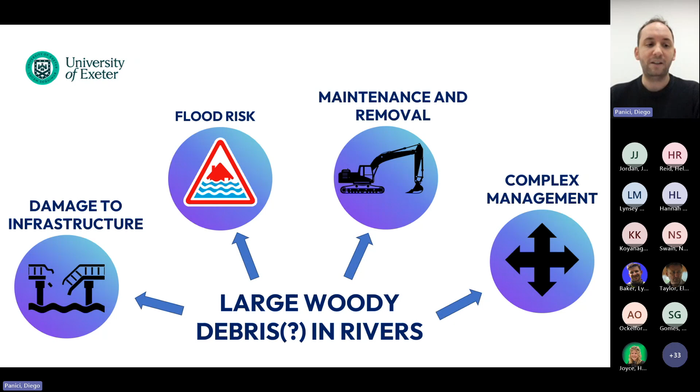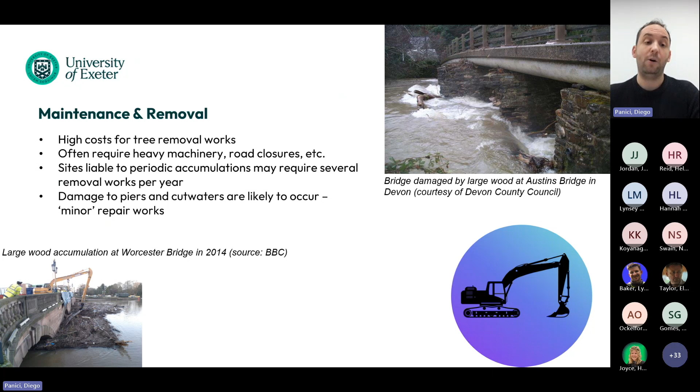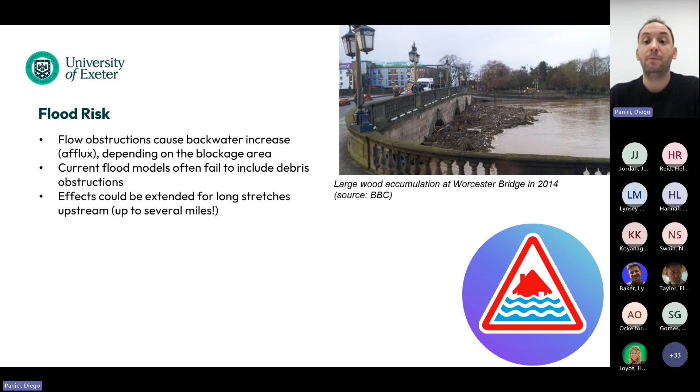And we have flood risk. That's perhaps quite an easy one to spot, because we have a blockage of bridge openings, meaning that we reduce the available flow area, and therefore the increase in the backwater will be quite significant. And especially in large rivers, the effects could extend for several miles. So it's quite an important factor.

But I guess one of the aspects that really has a substantial impact is damage to the infrastructure. Because what happens in this case is that the undermining of the bridge foundations can cause bridge failure. And we have seen it many times: when there's woody debris, although we will see shortly that this word should be dropped, it may significantly contribute to bridge failure.

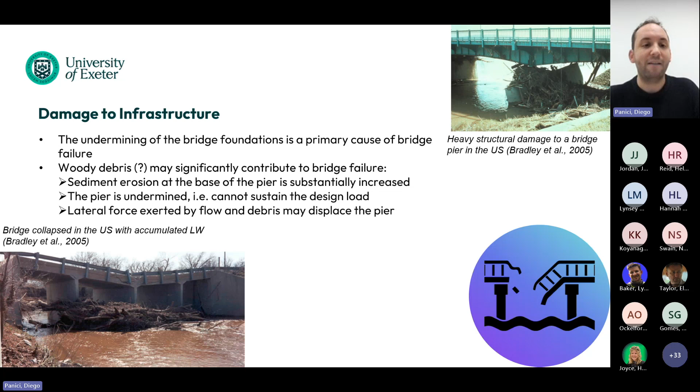Because what we have is an increase in the erosion at the base of the pier. There's therefore pier undermining, and that means that the design load the bridge was meant to be carrying can no longer be carried. But we also have additional lateral forces that can displace the pier.

So another one for you, a very quick one. How many bridge failures are caused by large wood? Do you think 10%, 20%, 30%, 40%, or 50%? This is just to see how important you think large wood will be in terms of bridge failures. And I'll have an answer for that very shortly.

Right, so there seems to be some consensus around 20% or 10%. 50%, that's very brave, but I can already tell you that is not the case. The actual answer is 30%. So roughly 1 in 3 bridge failures has been caused by large wood. So you can see it's a very important aspect in terms of hazard to bridges.

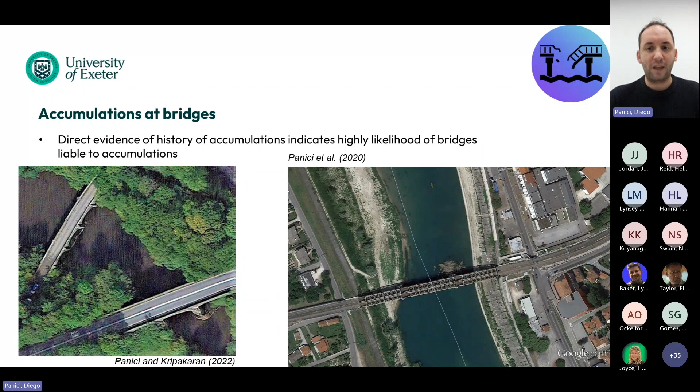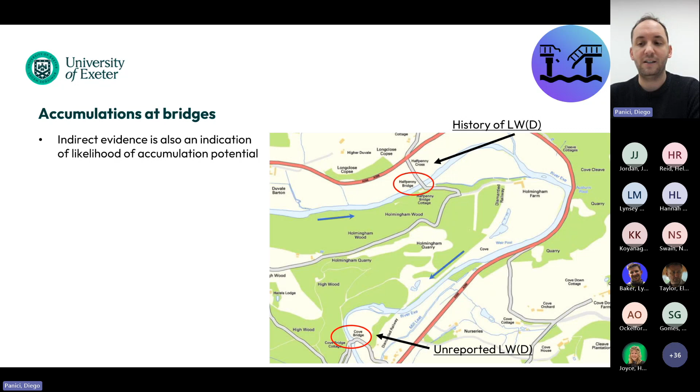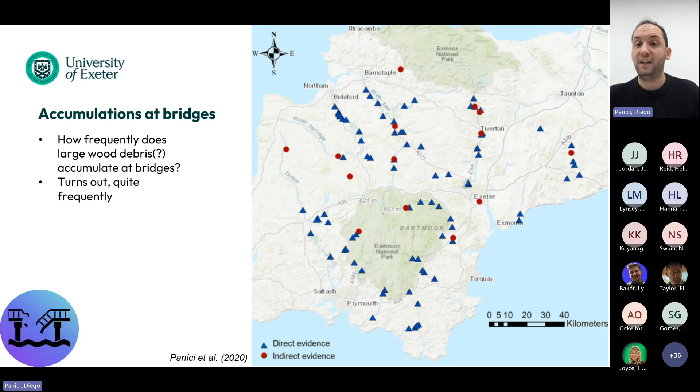But if you remember this slide that I showed you just a second ago, the majority of them do have a history of accumulated large wood. So it is actually possible to estimate that directly. That brings me to the next step, which is, okay, how do we define the hydrodynamic actions to the structures?

But when you add accumulated large wood, the increase can even double the depth of scour, meaning that if you are a bridge engineer and you are designing your bridge with a certain foundation depth, that might not account for the effect of large wood. And as we said earlier, 30% of bridge failures are actually due to large wood accumulations.

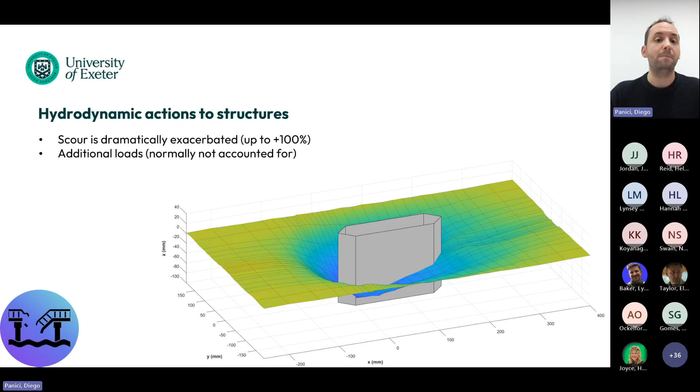But there's also a few other things to consider. So crucially, the size of scour depth depends on how much blockage we have, so how much large wood is accumulated at the bridge pier. It depends effectively on the area that is blocked by large wood. It also depends on the relative water depth, so the depth underneath the large wood jam, and on how much it extends upstream. So the first key question was, how do we determine the size of large wood accumulations?

Well, as part of my PhD, I carried out 732 laboratory experiments in a flume, which was quite a lot, I must say. And all of them displayed similar trends, similar patterns, which are quite crucial now to understand why we have these behaviors. So all of them resemble the half-cone shape. They had the same shape for all the different conditions that were studied.

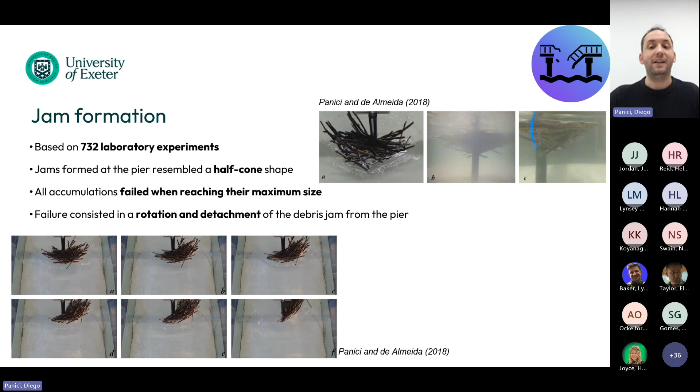So it does suggest that if we have accumulation of large wood and there's potential for large wood to accumulate until the very maximum size, that will be within the narrow band that we can observe there. And so we developed some equations with which it is actually possible nowadays to estimate the maximum size that a large wood accumulation can reach at a bridge.

And as part of my postdoc when I was here in Exeter, we tried to include that also in the scour estimation, because we have equations to estimate scour that are based on plenty of experiments from the past, but few of them actually investigate large wood. So we tried to do the same.

And what we found out is that instead of redoing the equations entirely, we can just include an additional factor, F_LW, in which we account for the increase in the scour depth due to large wood. And in that case, it just boils down to knowing the size of the large wood accumulation. So based on a series of experiments that we carried out, we were able to determine that F debris. And based on that, we have 3 different factors that depend on the size and the blockage area that determine how much it can increase.

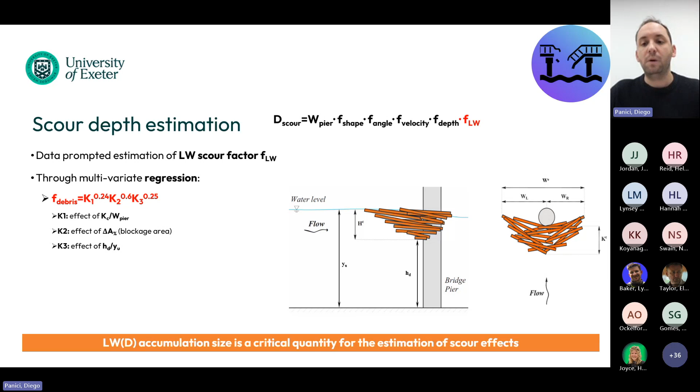Just to share that the results that we had from our research have been included now in two manuals. The one is the CIRIA SP171, which has been published in 2021, which includes several of the publications that we got out of it. So today it's possible, if you want to use those equations, to actually try to estimate the scour depth, but the same also for national highways.

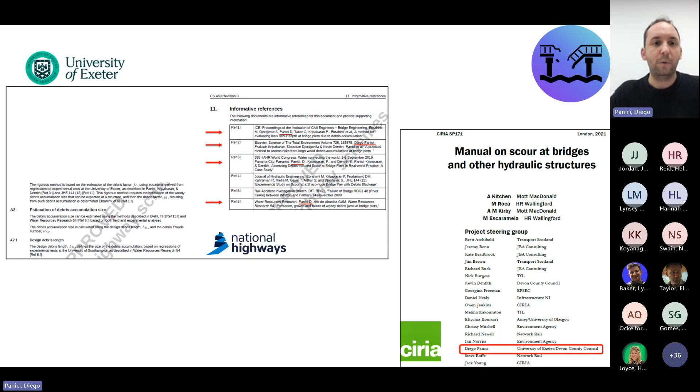So that's the CS469, which is a standard used for bridges in highways. And there is now a new section, which is compulsory for use, which gives you the estimation of large wood and the estimation of scour due to large wood. So it's quite interesting that all of this research that we carried out is now embedded within the standards for highways. So any bridge engineer will have to use these equations.

Right, so that was an overview on how we interpret large wood as a hazard. But of course, it's not the end of the story, and actually, this is just a small story in comparison to what large wood in rivers actually is. It is a resource, because we are the ones that are effectively creating the hazard by putting structures into rivers, but large wood is a natural resource. And nowadays, we started realizing that if we start using large wood for river restoration, natural flood management, or riverbank protections, it's an amazingly powerful resource.

So that's why you probably see over my presentation that large wood should not be referred to as debris when using restoration, or we should avoid calling it debris at all. So we should always call it large wood because, yes, it's got a hazard component, but most importantly, it's a resource. And therefore, this brings me to the second part, of how we interpret large wood in river restoration.

So I would like to, oh, where's my cursor gone? Sorry, I lost my cursor. Right, so if you could

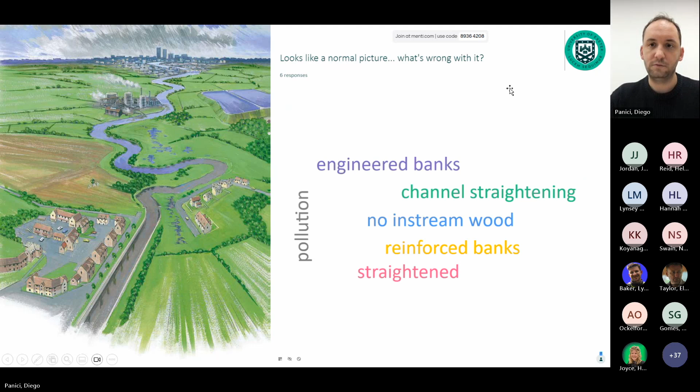Very nice. Oh, sorry. Some very nice and interesting answers. My Teams is going mad. Sorry, I'll just use this one instead. Yeah. Oh, I like those. Yeah, they're very good answers. Well done, everybody. That's fantastic.

So straightened, lack of trees, straight river, engineered banks, channelization. Wow, you're on fire, really, because all of this resonates a lot. Nutrient pollution, yeah, great one there. Development, hardly any trees, yeah. And that's also another ongoing issue for our landscapes, because we know that we do lack trees in our country. Yeah, amazing answers. Thank you, everyone. These are really encouraging. So let's have a quick look around.

Sorry that I flip from one to the other, but Teams doesn't seem too happy.

So first, impermeable surfaces. So we got a town, meaning that we're going to have a lot of impermeable surfaces, quick draining into the river system, high risk of flood, increased sewage spills into rivers. So all sorts of nasty stuff that we really don't like. And we do know that it's a problem that is actually increasing instead of decreasing.

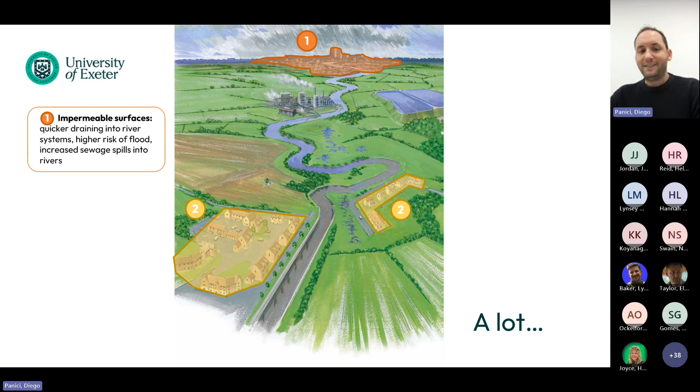Well, developments on floodplains. So we have human activities on areas that are near the river and that have very high flood risk, because floodplains are quite flat, easy to build. We need new houses, etc. Where do we build? In areas where the flood risk is quite high.

And this one came out quite strongly, and I'm very proud of all of you, because this is quite a crucial problem. Channelisation, so straightening, raising of the banks, disconnection with the floodplains. That's a huge problem that we are experiencing. It's so detrimental for aquatic habitat.

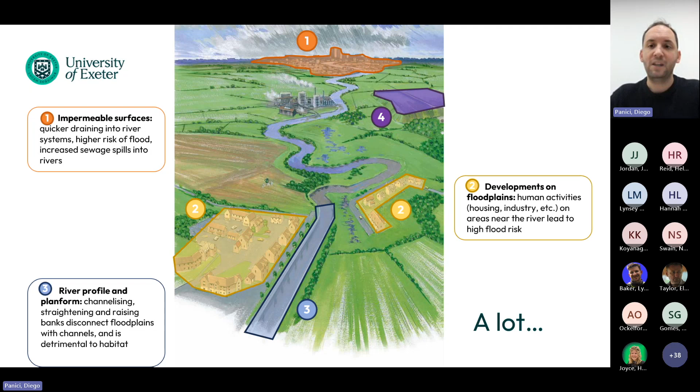Then we have water abstractions. So that was meant to be a reservoir in the drawing. I know it's not totally clear, but it's used to supply drinking water. However, we have serious issues of over-abstraction. We have dry out, loss of habitat, drop of water table. So again, all sorts of bad stuff.

And then we got industry and agriculture. And whilst obviously we need that in our society, they are quite nasty for pollution. So we have farming, industrial, agrochemicals. They have highly detrimental effects on water quality and biodiversity. So you can see that we are really doing a lot of bad things to our landscape.

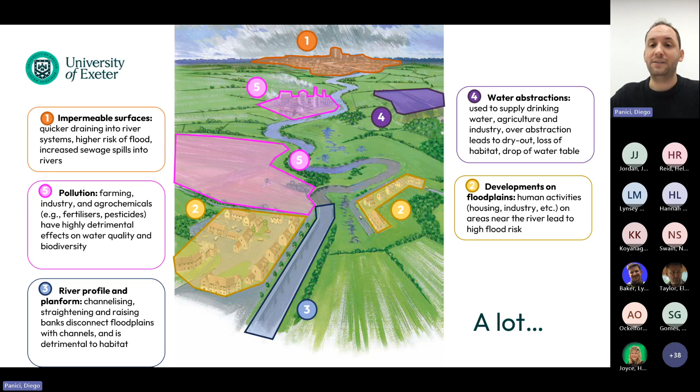And if you look at this picture, even more depressing, sadly, is that from the Rivers Trust report earlier this year, we know that there's no river in the UK that is in good overall state. This is such depressing news, sadly. And we can see that 85% of the river stretches fall below good ecological standards.

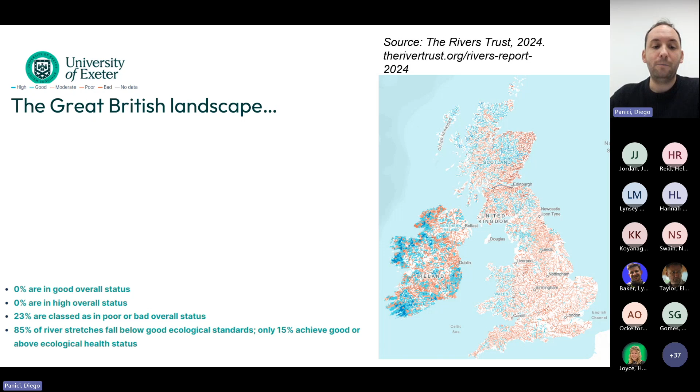So that's extremely concerning. And then if we want some other very scary facts, wetlands have declined by 75% in the last century, freshwater vertebrate populations by 83%. So this is an ecocide. We have 1 in 3 freshwater species at risk of extinction. So we're really facing a huge problem ahead of us.

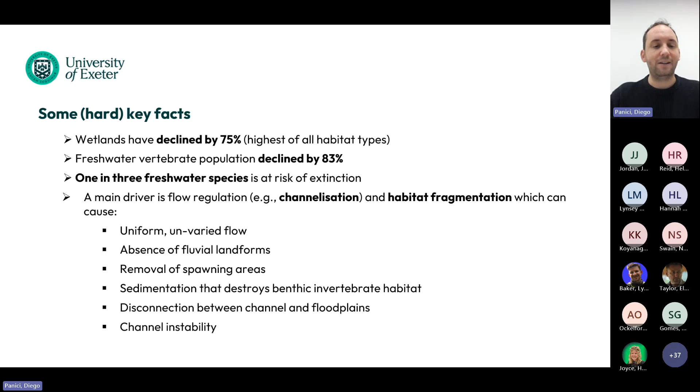And there's many problems, and we saw them earlier, but one of them, which is quite crucial, is flow regulation. For example, where we have channelization, because this creates habitat fragmentation. We remove potential habitat for fish and invertebrates. So there's a disconnection between the channel and the floodplain, meaning that all potential habitat area is completely removed, and then there's channel instability. So you can see that flow regulation, while commonly thought to be a positive thing, in reality creates a lot of negative results.

That's why river restoration comes into play. So river restoration has got basically three main targets, which are to recreate habitat diversity, increase the connectivity and continuity of watercourses, so create a whole big environment and habitat, and to reduce the spread of pollutants and contaminants. So what it's effectively trying to do is to change the hydraulic and hydrological functioning of a river system so that natural processes can be restored and replicated.

Also, quite importantly, don't forget that we need to create new flow patterns and fluvial landforms for habitat creation, because that's essential. Whereas if we have a channelized, incised river, that is not happening, and that is detrimental for aquatic life. Also, we need to increase the channel roughness to increase mixing and reduce flow velocity, so that creates spawning areas and rest areas for wildlife, and, of course, improving the water quality.

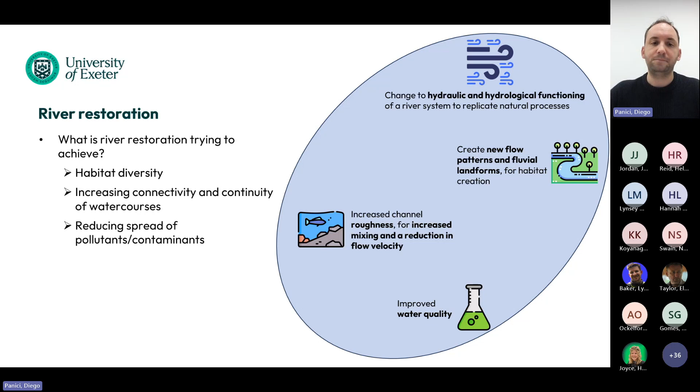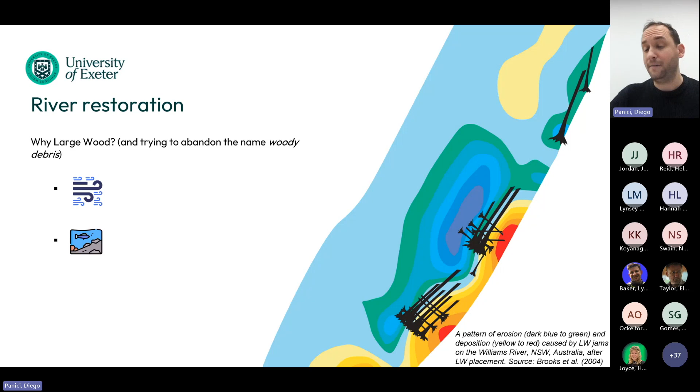And that brings me then to the question, why large wood? Yeah, we talked about river restoration, but why large wood? And as I say, try to abandon the term woody debris. So it does tick all the boxes that we say are needed for river restoration. So hydraulic variability: having large wood in a river would change the hydraulics around the large wood, but also on a larger scale gives more variety. Then the roughness is increased in the area surrounding the large wood and creates a gradient of roughness between areas not affected and areas affected, meaning that it encourages creation of habitats.

But we also have fluvial landforms that are highly varied when we have large wood. That's an example on the right-hand side from a restoration in Australia with the placement of large wood. You can see that even just a small intervention creates such diversity in terms of fluvial landforms, which is essential. And then there's the possibility that having large wood would actually improve water quality overall.

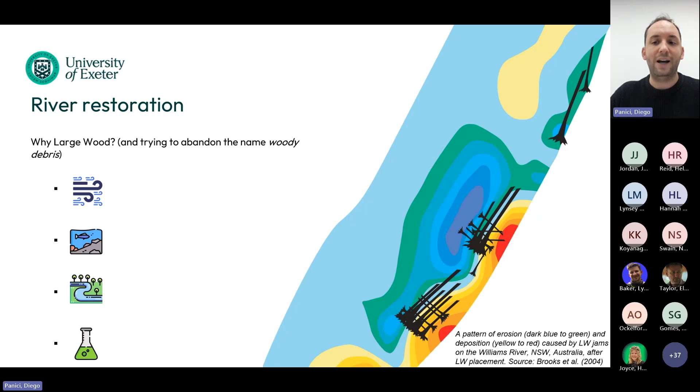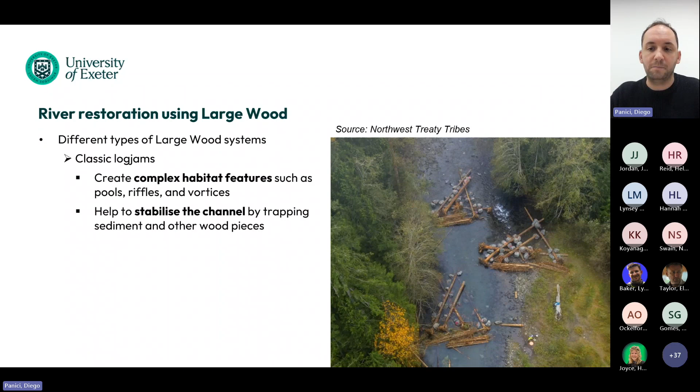The various types of large wood used in restoration can be many. Just to give you a quick overview of the most used ones: log jams are quite a classic. They create complex features and they favor pools, riffles, creation of vortices, so recirculation areas. So that's this nice connection between geomorphology and hydraulics here. They help to stabilize the channel. Sometimes rocks and other supports are used to make that possible.

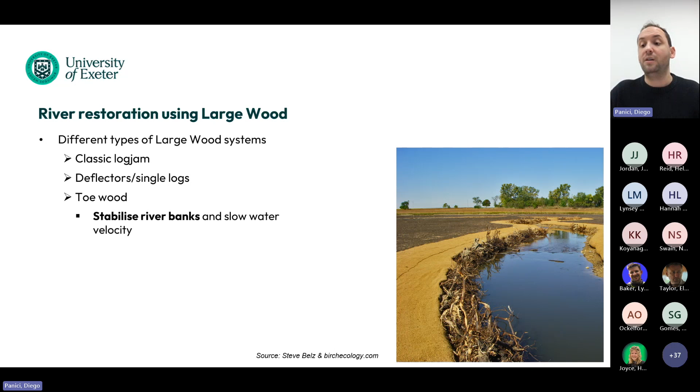But one that I'm particularly fond of and has been making the news recently is called Stage 0. This is a relatively new concept, but what does that really mean? Stage 0 is aiming to bring back a river prior to the Anthropocene, so prior to us humans changing the landscape. Effectively, what Stage 0 tries to achieve is to create multi-thread, shallow, low-banked, all connected channel branches within the floodplain.

So Stage 0 is trying to go back to the 1700 situation, or ideally even before that, because we know that in the UK the process of channelization had already started. So we want to go back to the stage in which the river is free to flow and free to go wherever it wants. Normally Stage 0s are thought of as two stages. The first stage is lowering the floodplain and infilling the channel. So instead of having an incised channel, we have a channel that is infilled and the floodplains are reconnected. That's the first key stage.

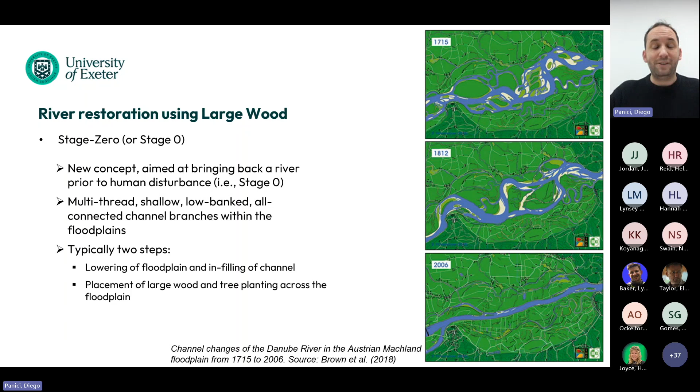Then the next stage is the placement of large wood and tree planting across the floodplain, because that creates flow variety, creates some stability, and also creates different landforms so that there is variability in terms of flow and habitat. And a site which is extremely interesting here in the UK is Holnicote Estate in Exmoor. This is owned by the National Trust, and a year and a half ago they decided to trial Stage 0 on the River Aller. This was 2022, and that's some drone footage by my colleague Alan Puttock.

You can see this is essentially the channel. The channel was straight, no variation. This is the DEM, reconstructed DEM, and apart from the canopies, it is very much what you could expect from the majority of river channels in the UK. However, post-intervention in 2023, they've effectively done the two stages. First, they infilled the channel and lowered the floodplain so that the channel could flow freely onto the floodplain. But also, they installed a huge amount of large wood all over the place, creating a much more varied channel and floodplain. And you can already see that the area which contains water is much more extended than before. So wetland recreation in itself has been huge.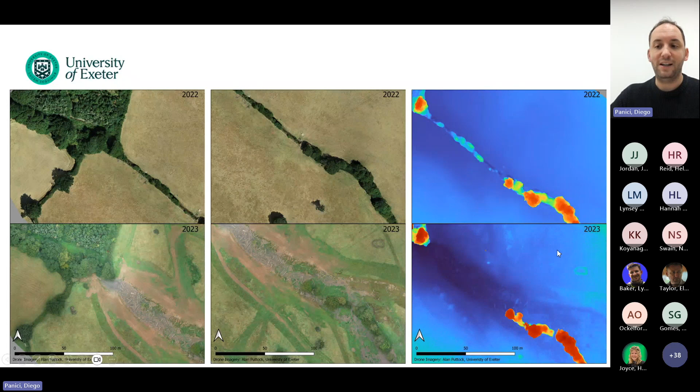Another last minute, and I swear this is the last one. In the footage and photos that you were just shown, what were, in your opinion, the most striking features? What really caught your eye and made you think, wow, this is really cool?

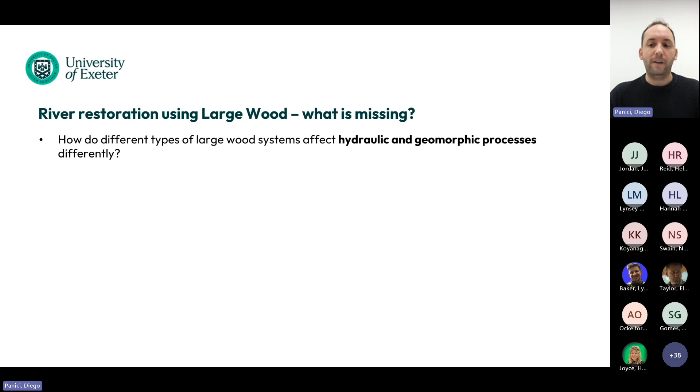We can go from as simple as putting a log in the river to creating a total mess, a total beautiful mess. But what are the actual hydraulic and geomorphic characteristics? We don't know that yet. This is something that we're still trying to figure out. And then this brings me to the next question.

Okay, what if we know what the hydraulic and geomorphic processes will be, but then what could be the optimal placement and configuration of this large wood in the different types of river and stream habitats? Because again, that's something we don't really know. There are quite a few restoration schemes now going on, but we don't really know which one works best. So this is something that we really need to understand.

And then another important fact, we've seen restoration at the small scale, so site scale, reach scale, but what about catchment scale? We don't really know that yet. We don't know if we implement large wood, what would change at the catchment scale. Would it have an effect or will it not have an effect? So this is something that we really want to investigate.

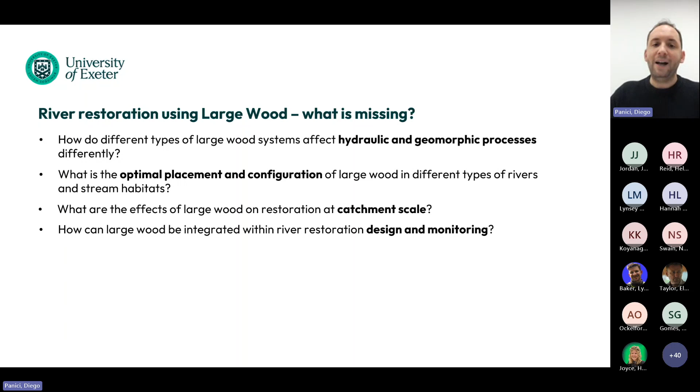And then finally, how can large wood be integrated within river restoration design and monitoring? In all the conversations I had in the past, whenever there's large wood included in restoration schemes, normally it's a bit of a random choice rather than being guided by guidelines or suggestions. But answering the questions above can actually inform what we see there.

So what are the next steps then? So currently, I'm supervising a PhD researcher that is working on this through one of the NERC GW4+ DTPs. She's doing an excellent job in that, and we are monitoring some of the sites, including Holnicote, and we're planning to do some modeling on that.

But one of the very biggest news recently is that we've been awarded a NERC Pushing the Frontiers grant. So I'm leading this as principal investigator together with the University of Edinburgh, which is our partner. And we start the 1st of October next year. And we're planning to do quite extensive work, which would have fieldwork in the sites that are shown there.

Numerical modeling, so we will try to replicate the hydraulics and, if possible, even the geomorphology of these sites. And then we want to use artificial intelligence to optimize the design of river restoration using large wood. So that for us is the final aim, getting to a stage in which we have knowledge of the processes happening and we can try to advise and provide guidance on how to actually implement large wood in rivers.

And a question for you that you can answer on the Padlet or just send me an email or later in the Q&A. Do you know any restoration site that is worth investigating? Please let us know, because we are, of course, very interested, having this NERC project, also to see what's happening outside of these areas that we have identified.

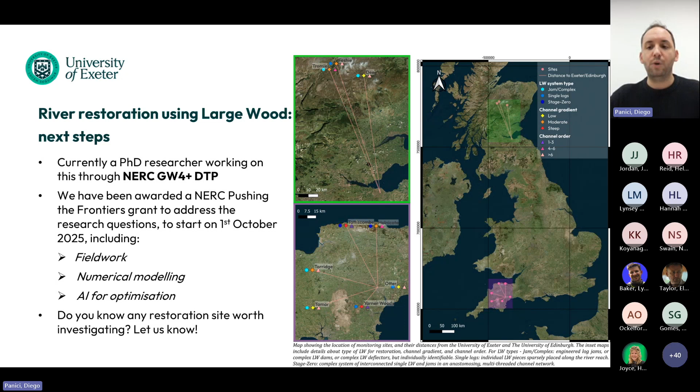So we're getting to the end of it. The conclusions. So in-stream large wood has historically been controversial, and we have seen that it does indeed include hazard, but it also has a huge restoration potential. The key hazard problem is the accumulation at bridge piers, and it's known to cause substantial damage.

We saw that up to a third of bridge failures can be related to large wood. But we have now the means to identify the bridges at risk and potential consequences. So that means that if we know there are bridges at risk, we can also implement protection measures so that we don't have to remove large wood from rivers, as it's been done sadly in the last decades, but we can actually try to protect those bridges and focus more on the restoration and resource properties of large wood.

River restoration then is necessary because we have substantial damage to our rivers, so we do need to act, and we need to do it urgently. And large wood is one of the best natural solutions for encouraging habitat formation, and it's also a natural resource that we have freely available. So there are some key research questions that remain open, but it is our work for the next 4 years, and we're very keen to collaborate with any like-minded people on this.